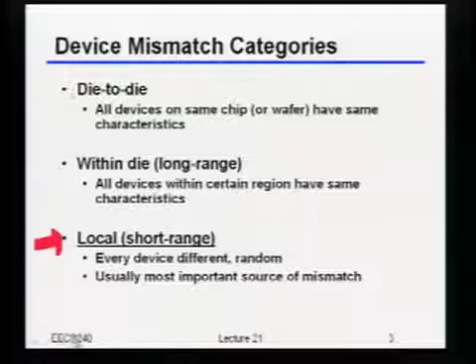So if we take a look at the local variations, which again we said are the ones that are really going to be the most important to us, there's again two different categories we can come up with here, or two different types. The first is so-called deterministic sources. What I mean by this is something in your layout causes these two devices to intrinsically not be exactly the same. Something is causing some mismatch there.

And when I say it's deterministic, that means if you knew everything about the process, you could actually predict exactly what the error you created was. Now, unfortunately, the process is pretty complicated. There's lots and lots of weird effects that could come up. So sometimes it's actually hard to really predict what these deterministic sources will cause. But they're certainly there, and they're something you need to be careful about.

The other one, which we're going to spend most of our time focusing on today, is the random sources of variation. So let's just see where each one of these would come from, really briefly. In terms of the deterministic sources, that's usually things like, again, something in your layout is not quite exactly right. So let me just draw an example.

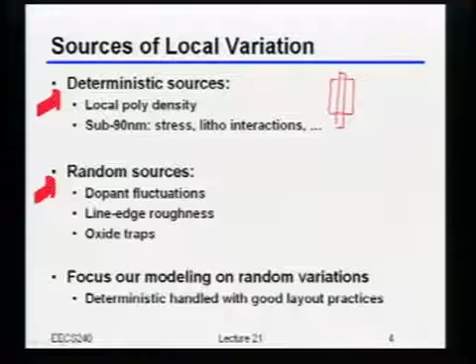If I take one transistor and I draw it like that, versus I have another transistor like this that happens to have another transistor next to it. Well, it turns out this transistor will definitely not behave the same as that transistor, nor will it behave the same as that transistor. And there's a whole bunch of reasons why.

One simple example, which I mentioned way back in the beginning of class, is that the speed at which you actually etch the poly depends upon how much other poly there is around, or how much final poly you want to stick around. In other words, this device right here might end up having a shorter channel length, ever so slightly, than this device right here. Now, that's actually a fairly classical effect.

When you get into 90 nanometer and below technologies, you get all kinds of other fun. As an example, in 90 nanometer, people are essentially stressing the transistor. Either they're pulling the channel apart or compressing it in. That turns out to improve the drive currents. Well, when they add these stress layers, that's like a mechanical structure, right? And so it depends upon what else happens to be around it.

As an example, if you have two transistors like this, depending upon how far away you put this other transistor, because that impacts the stress liner, you could actually change the amount of current that's flowing through this device right here. So bottom line, there's lots and lots of ways that things can interact with each other.

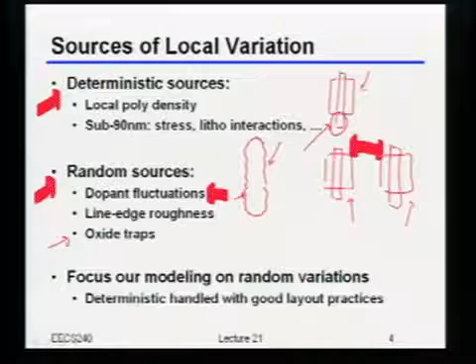So you can imagine if I actually have this inside of my channel, we like to think of having just a certain L and a certain W, but obviously, this thing has some weird composite of L and W, right? So depending upon what exactly that weird composite was, you might get slightly different electrical characteristics. There's also things like oxide traps, a whole bunch of other more detailed things, but bottom line, there's lots of things that are really truly random variations. And again, when I say random, that means that you can't predict ahead of time what the actual value will be. You can only say something about the statistics of those variations.

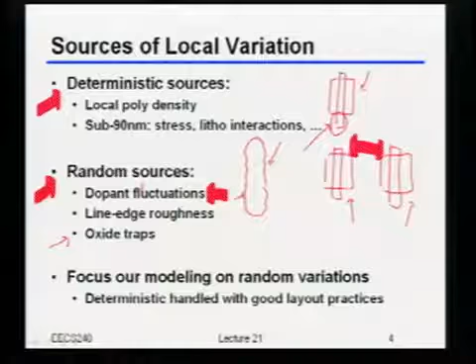So we're going to mostly take a closer look at these random components, because everything else we're going to assume we can handle by using good layout practices. Now, of course, a lot of these phenomena, the fact that no two transistors match each other, is by no means a new problem. This has been around for a long, long time. So there were actually quite a few in-depth studies that a whole bunch of people have done to really try and understand these issues and the mechanisms for variation.

So the classic reference for MOSFET mismatch is this paper by Marcel Pelgrom, done back in 1989. What they basically did is took a whole bunch of wafers that were being fabricated at Philips at the time and built some fairly careful test structures to very precisely characterize the mismatch they were seeing between pairs of nominally identical transistors. Turns out to really measure this correctly is kind of tricky, because you can never quite tell if the mismatch you're measuring is because it's really mismatched or because you made a mistake in how you laid it out and you had some small deterministic error left over.

But basically this Pelgrom paper, they're the first ones that really came up with a model for how mismatch should behave. And still today, this is the classic reference. So if you've never read the paper before, I definitely encourage you to go back and take a look at it. It's pretty old, and in a very old technology, but actually the model is still basically the same model that we use today.

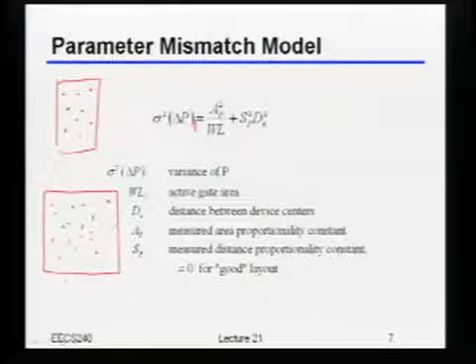And unfortunately, if you want to fix mismatch, well, we'll talk about some more clever approaches, but a lot of the approaches basically boil down to you have to make the device bigger, okay? Oftentimes when you have to make the device bigger, that means you have to spend more power than you otherwise would have wanted to. And you can do some very basic calculations. In modern technologies, if you don't do anything else, mismatch can turn out to be the dominant cause forcing you to dissipate a certain amount of power. So that's why we're going to spend some time talking about all of this.

Now, before I move on, one other thing I should mention: I included this distance proportionality constant, this SP over here. That's just saying that if I have two devices that are supposed to be nominally matched and put them right next to each other, versus, for example, putting them 100 microns apart, clearly the farther apart you put them, the worse the mismatch is going to be. That's what this distance proportionality constant is doing for us.

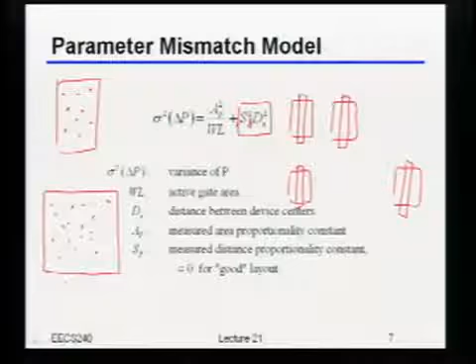But as we'll see, and as is probably obvious, if you do a good job with the layout, this term, generally speaking, you're going to try to make go to 0. You're going to try to make it so that the devices are literally right next to each other, even if the devices are really big and you can't truly make them right next to each other. Does this make sense to people?

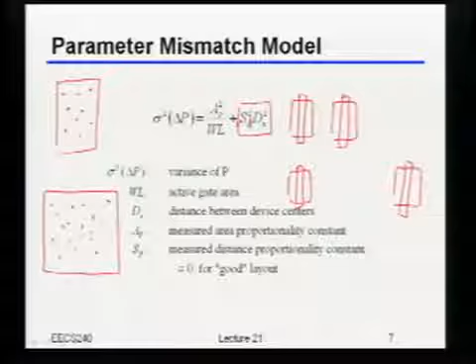Okay. So the first and probably the most dominant form of mismatch that you're going to be worrying about turns out to be the threshold voltage mismatch. If we look at the form of that threshold voltage mismatch, it's exactly the same as what we just said. Basically, the sigma squared is set by some AVT squared, which comes from the technology, divided by the area of the device, plus this distance-dependent term.

So just a quick thought process here. If my AVT was 30 millivolt micron, and I had, let's say, a 1 micron by 1 micron device, what does that say the sigma of my threshold mismatch is? And let's assume the devices are right next to each other. 30 millivolts? Yeah, 30 millivolts.

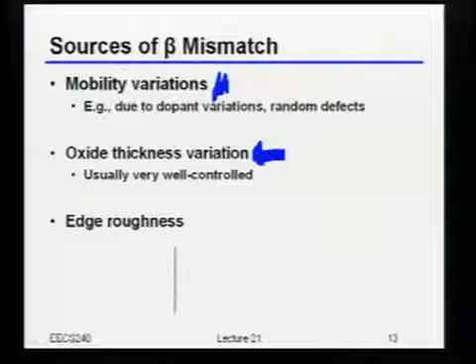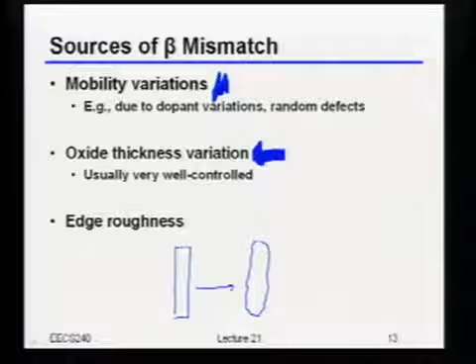The last one, which is more interesting and starting to matter a little bit more these days, is this edge roughness that we had talked about. Even though I may draw my transistor looking like this, when I actually print it, it may come out looking something like this. So let's put all of these together to come up with the model for our total beta mismatch, our total current factor mismatch.

What I'm going to look at here, because this is usually the way this thing is specified, is the variance in that current factor normalized by the nominal current factor. In other words, this is like saying there's a 1% relative variation or a 10% relative variation and so on. Because usually the absolute number is not quite as useful. It's really the relative variation you care about.

So if I want to know the relative variation in that current factor, if I assume that each one of those physical parameters varies independently, then the overall mismatch should just be related to the sum of the variances of each one of those parameters, relative to its nominal value. So as an example, if I have some mismatch in the width, there's some variance of the width divided by the nominal width squared, plus some variance in the length divided by the length squared, and so on and so forth.

Now, there's actually a pretty interesting effect that you get into here. So it turns out that if you think about the variance of the width and the length, they actually depend on what was the other dimension that you used. In other words, if you want to know the variance of the effective width, you actually need to know how long the transistor was. Okay?

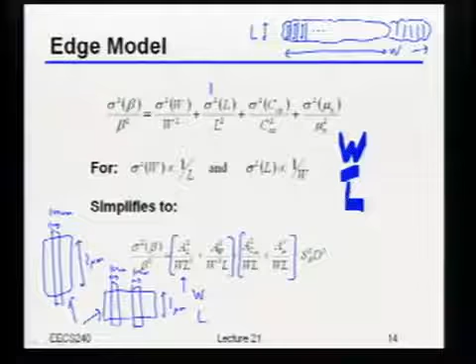And in fact, as we had talked about a while back, because of this, whenever I build a transistor, I almost always build it as at least 2 fingers, so that I always have current flowing both from left to right and from right to left. So that if I take that thing and then repeat it a whole bunch of times, I'm basically sure that I didn't mess up the current flow directions. So this thing, as long as I repeat it without turning it 90 degrees, I'm sure that it'll actually have the right matching from a direction standpoint. Okay?

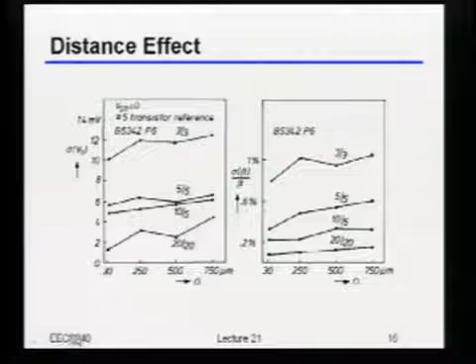So, as I'd mentioned before, all of these parameters actually tend to scale with technology. So the numbers that you get, for example, for that AVT parameter, which is like the proportionality constant, actually turn out to scale with technology. In fact, other of those parameters also tend to scale with technology. But I'm going to focus on the AVT here, because that turns out to be one of the most important ones, and also to scale in the least friendly way with technology.

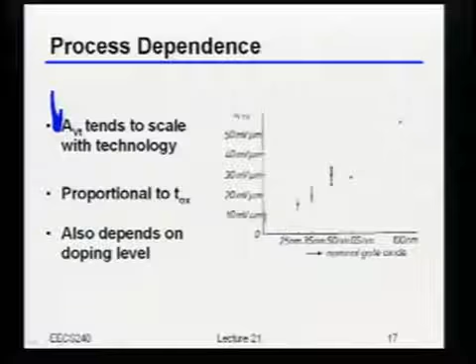So the interesting thing to actually look at is what are some of the numbers here. And this is now from the 0.18 micron CMOS process. This is again just showing that it's still following the trend of 1 over the square root of the area. But basically, if you go down to your 0.18 micron process, the AVTH is going to be roughly 8 millivolt micron.

So given that this mismatch is actually proportional to the oxide thickness, if I told you that AVTH for 0.18 micron is 8 millivolt micron, what do you expect that mismatch will be in a 90 nanometer process? What'll that roughly be, if I scale everything perfectly, just with the oxide thickness scaling with the technology? Yeah, 4 millivolt micron. Because the oxide thickness, at least ideally speaking, is about half of what it used to be. Now, turns out there's good and bad news here.

So, the good news is, for this device, if I keep the same area as the device I had in 0.18 micron, I'll get twice lower threshold mismatch. So if I had a 1 micron by 1 micron device here, it'll have a factor of 2 less threshold voltage mismatch, at least from a sigma standpoint. So that's the good news. What's the bad news? Yeah, my area scaled by a factor of 4. What's the even worse news? What happened to the nominal value of the threshold voltage?

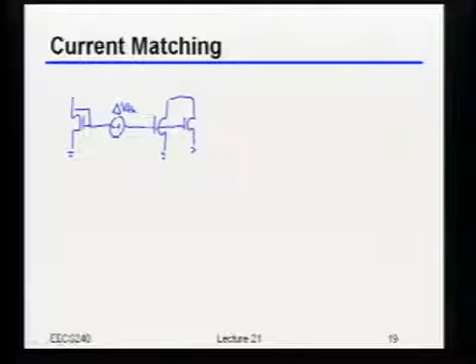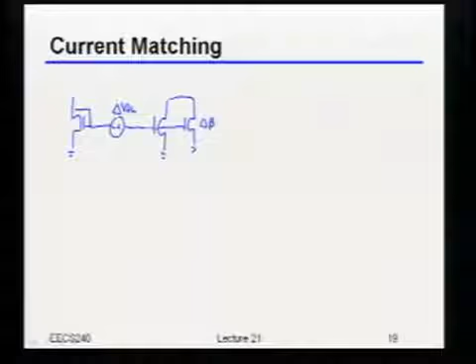And there are basically going to be 2 effects. One is there's going to be a certain delta VTH. And the second effect, which I'm just drawing conceptually, is that there's a certain delta beta, which I've drawn as a little bit of an extra transistor on the side. That extra transistor basically causes extra current to flow in the output based on what that delta beta actually is. Okay?

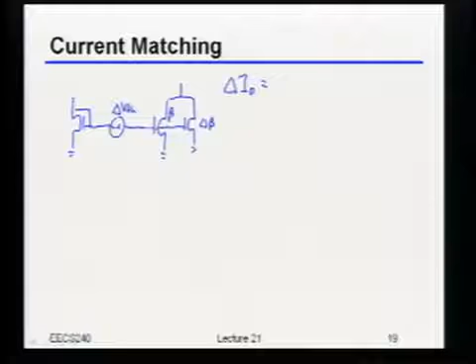So, if I wanted to look at the mismatch in current, what would that be given this setup that I've given us here? What would the mismatch in current be? Let's say that this has a nominal beta too, by the way. Delta beta by beta. I heard somebody say something. Just speak up. Delta beta by beta into I.

Yeah, so first, clearly I have delta beta over beta times ID, right? Because if this has an ID in it, this will have delta beta over beta times ID of extra current. So that's definitely true. What else? GM times delta VTH. There we go. Plus GM times delta VT, right? Okay, so now all I want to do is rewrite this slightly to give us a hint as to how we should actually size this thing.

So now I'm going to look at the normalized current mismatch. I'm just going to divide everything by ID. So I'm going to get delta beta over beta plus GM over ID times delta VT. Okay? So, what is GM over ID? What's our favorite parameter that we like to use all the time to replace GM over ID with? V star. Now, there's actually a factor of 2 there. That turns out to be 2 over V star, because remember, GM is 2 ID over V star.

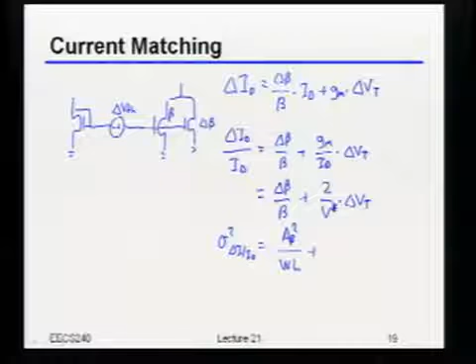Okay, so delta ID over ID turns out to be delta beta over beta plus 2 over V star times delta VT. In other words, to use our AVT and A beta parameters, that says that the variance of delta I over I is going to be A beta squared divided by the device area plus 4 AVTH squared divided by V star squared, again, times the device area. Okay?

So now, as should hopefully be glaringly obvious, and we've touched on it several times already, if I have a current mirror, how should I choose V star in order to try and minimize the mismatch that I get? What V star do I want? Large. Yeah, I tend to want large V star, right? Because the larger I make the V star, in essence, if I can make this whole term go to 0, then I can just be dominated by that A beta term. Now, what's the only minor fly in the ointment with making V star large?

Voltage swing. There is the voltage swing. What else? Yeah, you started saying it. You eat up your headroom. Okay, you eat up your headroom. Same thing. There's one other, remember, what does making V star large translate into? Power. Your efficiency is bad. Okay, your power efficiency is bad. I agree with that too.

Let's say that this is a current source, so this doesn't even set my GM, so that's not directly affecting my power efficiency. Small W. There we go, right? If I make V star big, that basically means I'm making the W small. Right? Because there's a certain current density associated with that V star. So in fact, oftentimes there turns out to be a certain optimum V star that gives you the minimum current mismatch.

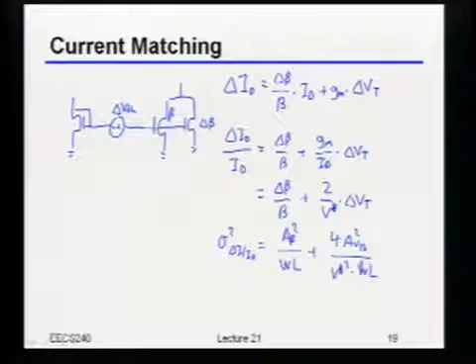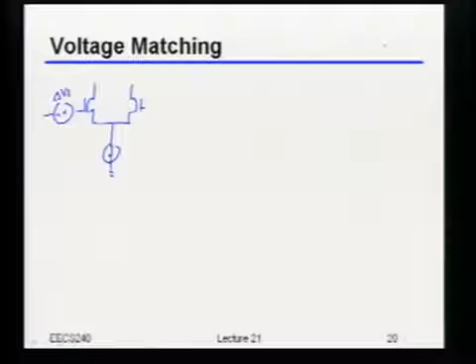Okay, so just like we might care about current mismatch, what you probably care about even more, particularly from the standpoint of your project, is voltage mismatch. So let's draw some differential pair, where again there's some delta VTH and some delta beta. So if I wanted to know the input referred voltage offset, what would that be for this diff pair here?

Well, let's start with the simple term. What's the simple term? So again, this is, let's say, VI plus, and that's VI minus. So what's the offset that I would measure from this thing? VTH by 2? Oh, it's actually just delta VTH. There's no divide by 2 because it's just a voltage source, directly in series. Okay, so there's a delta VTH. That's certainly there. What else am I going to get?

What other factor is going to translate into input referred offset? Delta beta by beta into ID by GM. There we go. So if I have this extra delta beta, even for the very same input voltage, I have some delta ID of current flowing out. So I need to translate that delta ID back into a voltage at the input, which, as Shiva just said, is delta beta over beta times ID divided by GM. Because to get from current at the output to voltage at the input, you just divide by GM.

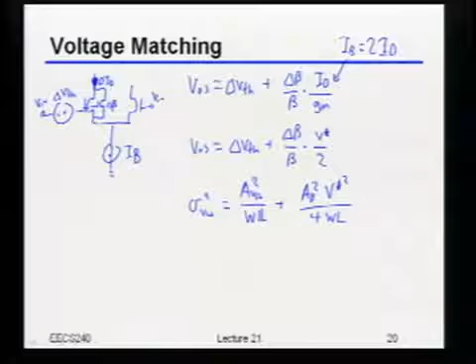So I think I'm maybe going to skip over this really briefly. We'll come back to it next time, because there's just one thing that I wanted to mention before we break for today, because it's really related to your project. And that's basically, how do you actually go about simulating mismatch? How are we going to deal with this from the standpoint of checking that everything is actually okay?

Well, it turns out there's basically something called Monte Carlo methods, which what they literally do is they have HSpice. They tell it, okay, all of these parameters vary with the following distribution. And to simulate that, HSpice pretty much literally just throws the dice, picks something from that distribution, simulates the circuit with that particular mismatch, and then tells you what the result is. And then it repeats that a whole bunch of times.

Okay? So as an example, a very common thing to do may be something like, take your differential pair, build some deck that measures what's the input referred voltage offset, and then run this Monte Carlo simulation through HSpice. Okay? So let's just plot a couple of things here.

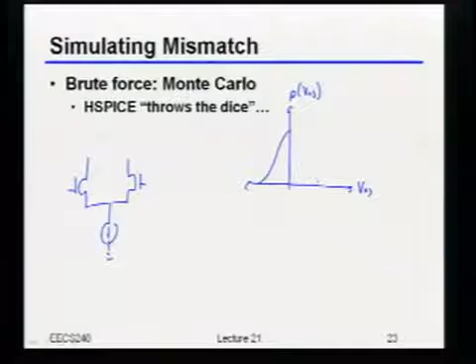As we'd said before, since all of these variations are supposed to be Gaussian, you'd basically expect that if I looked at the probability density function, or the PDF of the offset voltage, it looks something like a Gaussian, right? Which, again, excuse my poor drawing, but looks something like a Gaussian.

So now, when you go and do this Monte Carlo simulation in HSpice, Gaussians, unfortunately, go out infinitely long on the tails, right? So I don't really want to wait for HSpice to run 10 to the 15 or 10 to the 20 simulations, because even with really great computers, that takes a really long time, right? So usually what you'll do is tell it, okay, do like 100 Monte Carlo runs. What that means is it'll pick like 100 discrete points from that distribution.

So when you do that, what you'll usually get back will look something approximately like this. So if that's the offset, and this is like the probability that you saw that particular offset on your 100 Monte Carlo runs, you'll see something that'll maybe look like, and I'll just change color to make it more clear, okay, you'll have a bunch of them centered around there. You'll have maybe some more over there. Maybe you happen to not get that many here. And then it kind of roughly does the right thing. And then on the other side, it may look something like that. Okay?

So, this thing looks sort of like a Gaussian distribution, but clearly I only had 100 samples, right? So I can't really know what the real distribution is. So the key point here is when you do these Monte Carlo simulations in HSpice, be very careful with how you interpret the data. Okay? So definitely don't assume that whatever distribution comes back is the real distribution, because it's highly unlikely you did enough simulations to really figure that out.

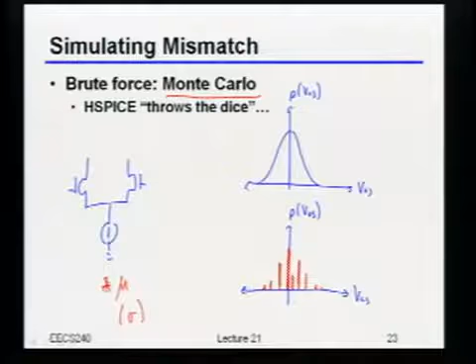So, as I'm going to explain in one second, I actually believe there's a much better way for you to handle these kinds of simulations, and that's what I'm really going to force you to do in the project. And the way I'm going to force you to do that is I'm not going to give you any way to actually run Monte Carlo. So I haven't done anything inside of the models that would actually let you do it. I suppose you could write a Perl script and do it yourself, but I'll still bash you on the report afterwards.

So what I actually claim is the right way for you to simulate mismatch, and what I do 99% of the time, is basically, well, this is going to be a little bit ironic, but the way I claim you should simulate mismatch is always calculate it first. In other words, don't simulate it. Calculate it. Because you have all of the parameters you need to actually figure out what the mismatch should indeed be. So if you do some Monte Carlo simulation, that should really be only to verify your calculation.

But I claim that even once you've done that Monte Carlo and you have the sigma and it matches what you calculated, what you should actually do is just take that mismatch that you calculated and add it into your circuit deterministically. So what I mean by that is, take your diff pair, let's say. If you calculated that the sigma of the delta VT was, let's say, 10 millivolts, you know how much yield you want to get. If you want 3 sigma of yield, then add in your circuit directly 30 millivolts of offset onto that differential pair. And then just simulate the thing.

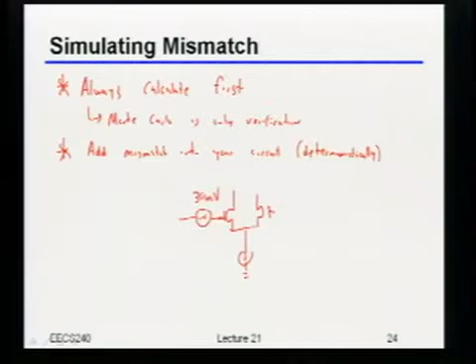So from the standpoint of the project, what you should be doing is calculate what the 3 sigma offset for each matched pair is supposed to be. Once you know that, just plug it into your circuit and simulate with that offset inside of it. The only other thing I'll briefly mention is, remember, mismatch is always between a pair of transistors. If I draw a differential pair, that AVT is the AVT between the pair. So be careful, because it's very tempting to take a single transistor and add some AVT onto it. That's not how it works. It's always between a pair of devices. Does this make sense to everybody?

Okay, so we'll just finish up with some of the layout techniques on Tuesday and then really move on to talk about how we're going to deal with this mismatch.